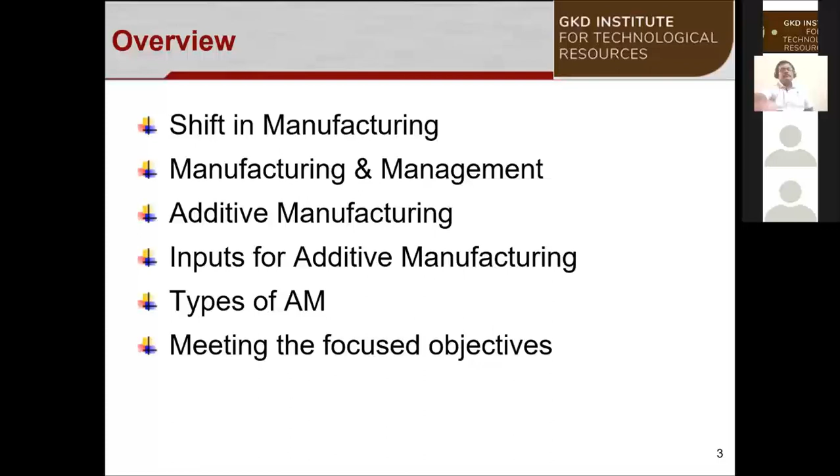So with the overview of both supply chain and additive manufacturing, then we'll touch on the objectives and some live case studies of the possible integration. So where did this shift in manufacturing happen?

We all know that in the early days, it was highly skilled labor, wherein he tends to produce excellent pieces of work, or excellent pieces of artwork. Here I have taken an example of a carpenter, wherein he had his own skills and produced one of a piece, or in the modern world, we can call it customization. He produced one piece and gave it to that particular customer. And that was maybe like 200, 300 years before, or even before the industrial revolution.

Then came the industrial revolution, and we moved into mass production. Whenever I was reading about where this actual manufacturing shift took place, I came across an interesting fact that we Indians played a major role in making the entire manufacturing take a major shift, or in a way we were the people who brought this innovation into manufacturing. How I can say that is, we all know the story of East India Company getting into India.

When East India Company came into India, the situation was they were in need of more rifles as the protest was growing in India. During those times, if we wanted to send information from India to Birmingham, or to London, it would take about 15 complete days for the information to travel from India to London. Then they would order for manufacturing the product, here meaning manufacture of rifles.

As mass production started changing, or the manufacturing was changing, all this time we were involved in a process called subtractive manufacturing, wherein if you want to produce a product, you take a bulk of a product, subtract whatever you need, and use that final subtracted quantity as your end product.

So that's why it was called subtractive manufacturing. All this time we were using the concept of subtractive manufacturing, and as the production need started spiking up, there came innovations and inventions in manufacturing techniques, like various types of machines came into existence.

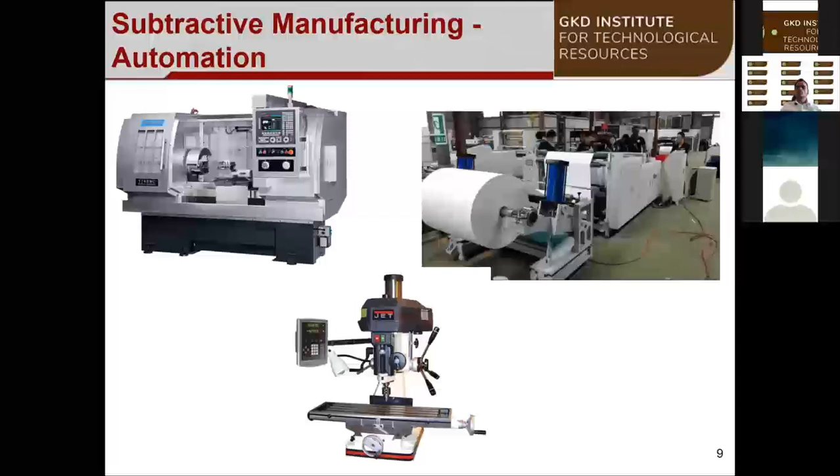Fine, but all the machines are not sufficient. So then we moved on to automation, wherein we wanted to go for mass production at a wider range. That is where subtractive manufacturing got combined with mechatronics, and then came the age of automation.

As we were moving on with higher production rate, people thought we need some more things to come in, and that is why we started finding a shift in manufacturing. Manufacturing started changing and getting improved. That is the time period wherein manufacturing and management got integrated together. They wanted to make sure the manufacturing happens smoothly through the entire supply chain within the entire industry.

So that is where many terminologies started coming up, namely assembly line, batch production, mass production, process optimization, automation, time study, method study, just-in-time manufacturing, lean, agile. All these management terminologies started popping up. This was the era wherein manufacturing and management found a good integration.

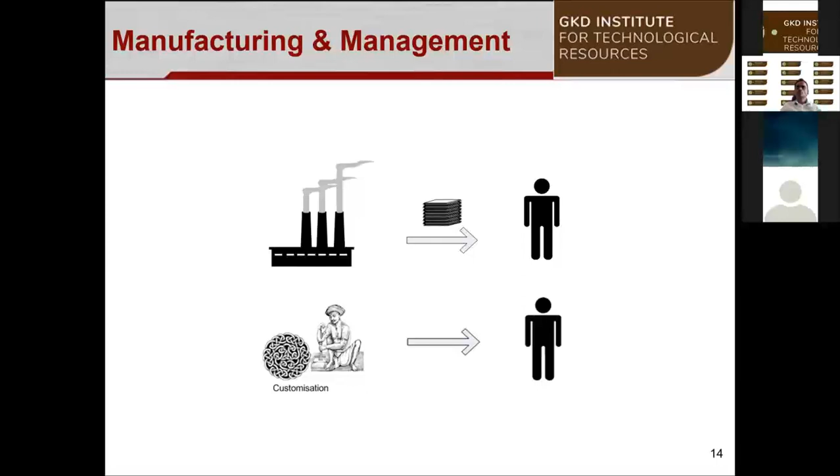Going back a bit, at the very early stage, there was only one manufacturer producing a component, which was a highly custom product, and he would deliver it directly to a customer. As time moved on, we could see a major shift in manufacturing and management taking place.

That led to a complete transformation in the supply chain. You had a bunch of manufacturers, then a set of wholesalers, then it moved to the retailer, and finally the product moved to the customer. So it was no longer from manufacturer directly to the customer, it took its own line. There came a major transformation in supply chain.

So we called it inbound supply chain and outbound supply chain. If we take manufacturing as playing its role in the middle, anything that goes inside is called inbound supply chain, and anything that goes outside towards the customer end we call outbound supply chain.

Ideally, if we take any supply chain, there are three flow lines that go by: one is the material flow line, another is the information flow line, and the final one is the money flow line. I'm not going to touch on the money flow line, just the material and information flow line.

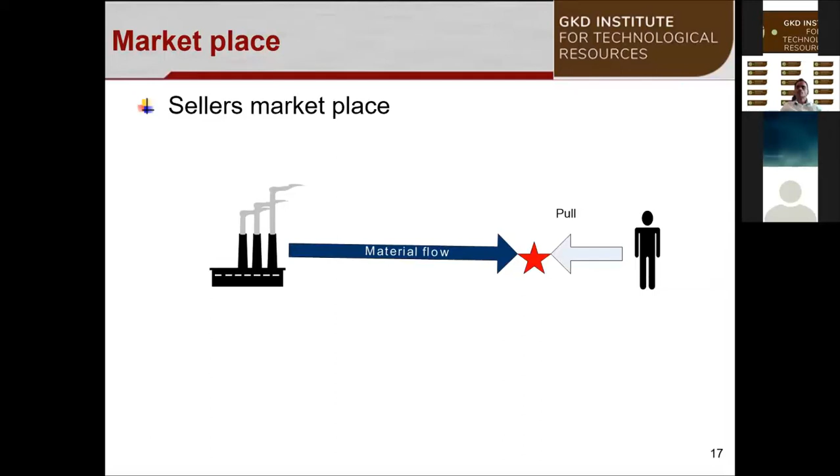So it was more of a seller's market. The examples we can speak of for a seller's market is where we could find a particular model, the 800 model, there in the market for more than 15 years. We had these bulk TVs, which were in the market for more than 20 years. And if we take one of the mature products, paste, that was there in the market for 50 to 70 years. So all these products existed when the market was a seller's market.

But now we know it is no more a seller's market, because we could see the automotive industries keep uplifting their models once every 4 years. And we know the electronics industry is bringing up newer technologies, 3D televisions, UHD televisions, the TVs are changing once every 6 months. You tend to find a new model coming out.

And even with the paste, we could find clove flavor. I was surprised to see that Colgate has about 21 different types of flavors, or 21 varieties of its own, in order to hold themselves in the market space. So this gives a clear idea that it is no more a seller's market.

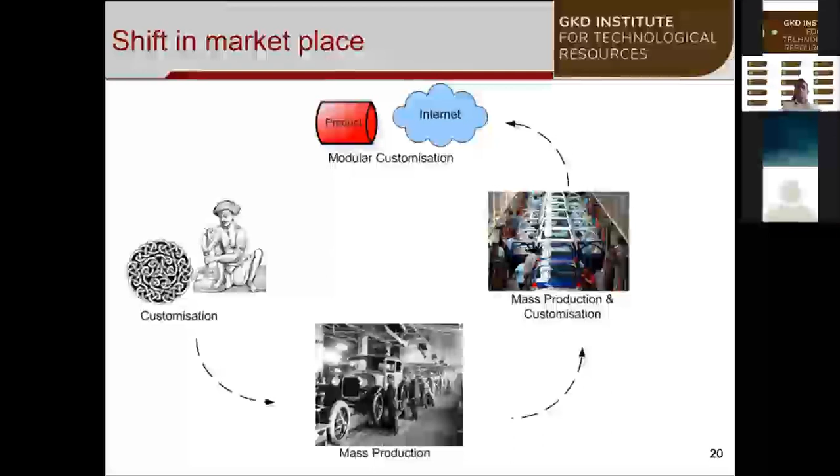The market has made a shift, and where that market had shifted is the question mark. So that is a market shift which is taking place. And what is the driving factor making this marketplace go for a major shift? It is nothing but information, because as we saw a few minutes before, information is the one which starts triggering the material flow, and the idea is information needs to go as much inside as it can, it is striving of itself to go as deep inside as possible.

And this was made vigorous with the invention of internet. With internet popping up, information started flooding inside, as much in depth as it can go. And this started changing the marketplace at a very wide range.

The moment information started going in, immediately what we had lost years or decades before, which was customization, slowly started popping up. Earlier it was mass customization, and from mass customization it moved to modular customization. Let me take you through an example of how information started bringing customers modular customization.

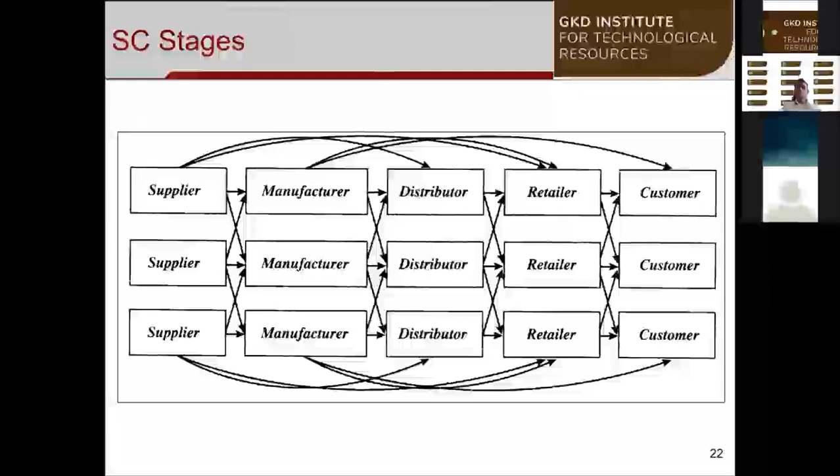Let us look at a product where we could see a customer involved in assembling the product. Most of the time I hear from people, no, I have never seen an issue where a customer is directly involved in assembling a product. Because I tend to ask: can you name one example where a customer assembles his own product? And if we take 1,000 customers, there are 1,000 customers who come with 1,000 different options for his product. And if I ask them to name that, people tend to say, no, that is not happening. But in reality, that started to happen 10 years ago itself.

Let me take you through a case example. If you want to go for a purchase of a computer, ideally when we go to purchase a computer, we have 5 different criteria in mind, or the most generalized ones that most people go for. One is the spec, like what hard disk they're looking at, what graphics card they're looking at, what RAM they're looking at, the price or budget they have fixed, and the design they are looking at.

Some people would like to have a lightweight, 14-inch laptop. Some people would say that for them a wider screen is better, so a 17-inch laptop. So it depends from person to person. The design becomes one of the criteria, and some people stick to certain brands, and we have our own notion on the brand, and we also decide how good the service is. So these would be the generic five criteria that we take before we go for a purchase of a computer. So when we go in with this particular spec, and go to a shop, we find so many computers there. Some way or other, we tend to make a compromise.

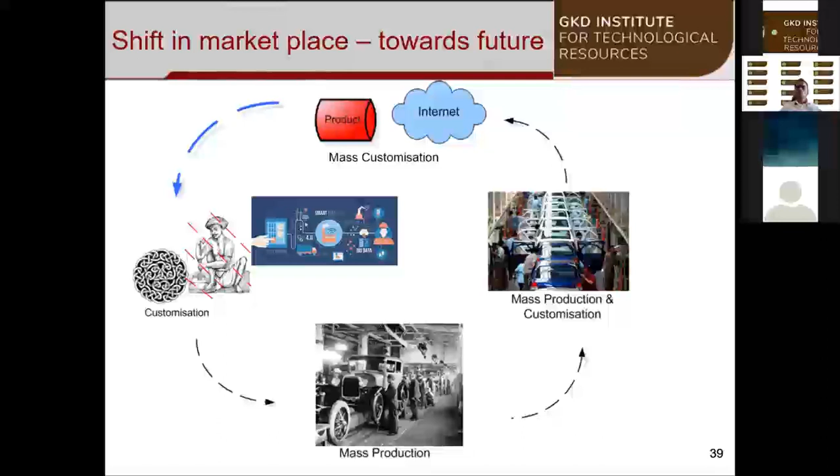In terms of manufacturing perspective, all that happened is it started to close the cycle, wherein the traditional highly skilled labor who was able to customize products is being replaced by newer technology, which is additive manufacturing technology, spoken of at a very wide range. That is why you would find Industry 4.0 carries additive manufacturing as one of the major entities among the seven different entities.

So, what is additive manufacturing? This idea of additive manufacturing earlier came with many names. This technology was ideally invented as a replacement to prototyping, because they got fed up with clay-based prototyping, thermocol prototyping, or wooden-based prototyping, as it was taking its own time. That was the period they wanted to make prototyping at a faster rate, and when they wanted that, they needed a better technology, and that is where it was coined as rapid prototyping.

So when rapid prototyping came into existence, this happened somewhere in 2001. Airbus was suddenly in need of a quantity of 400 nozzles which they wanted to place in their flight. They realized that somewhere they missed the paperwork and couldn't produce the die for those particular nozzles.

The demand was for 400 units, and now they didn't have time to produce them. That is why for the first time they thought, can we use rapid prototyping, because anyway it's a plastic component. They could make the drawing, and once they made the drawing, they knew they could print it in a rapid prototyping machine. So Airbus went for this technology for the first time and bulk produced 400 units. Rather than going for injection molding, they produced them in rapid prototyping machines. This made an entire change in the scenario.

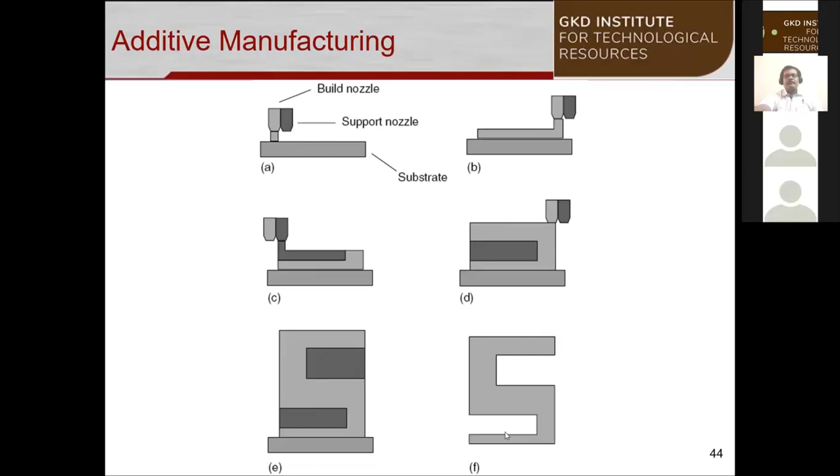Once the product is built, taking it out from the table, the support structures are removed, and you get this final end product for application. So this is the entire idea behind additive manufacturing, wherein you keep adding layer to layer and then you produce your end product.

Like all machine sequences, if we take a lathe, we need to hold the raw material, make sure it is centered properly, then go for clamping, and then go for the tooling operation. In the same manner, as we follow a particular sequence for each and every machine, like hobbing or a planer, each has its own sequence. Similarly, additive manufacturing also has its sequence, but the only difference is, no matter whatever be the type of machine, mostly the sequence of operation for additive manufacturing tends to remain the same.

Here, let us say that whatever you give as an input, it is converted into a common language, which you call as surface tessellation language. This is the language which is generally used in all the additive manufacturing machines.

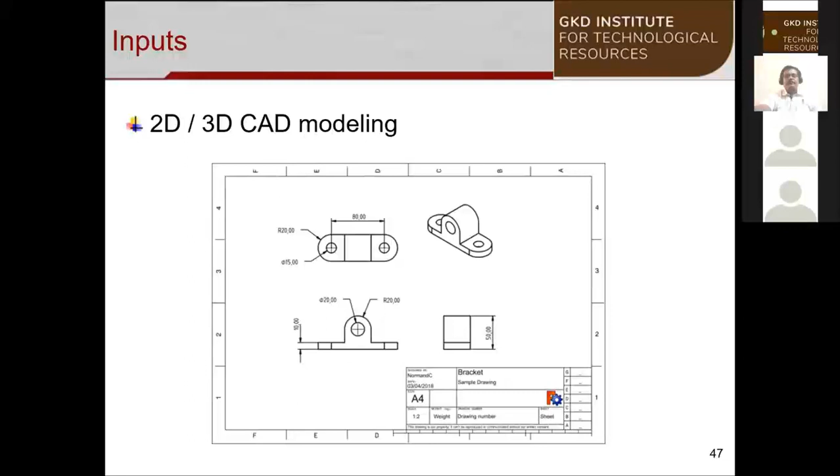Anything you give as a 2D or 3D drawing can be taken up. People were pretty comfortable giving 2D and 3D drawings, and that is the period they thought: can I use a CMM, get the data from there, and do a reverse engineering process? Because if I have a die which is worn out but don't have the dimensions immediately, let me put it under a CMM, probe it, and from the point cloud data fine-tune the dimensions and still manufacture it through additive manufacturing. So that was made possible.

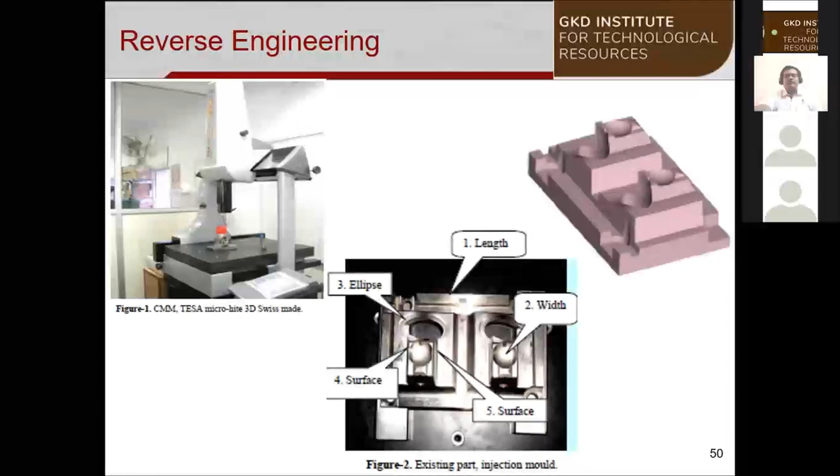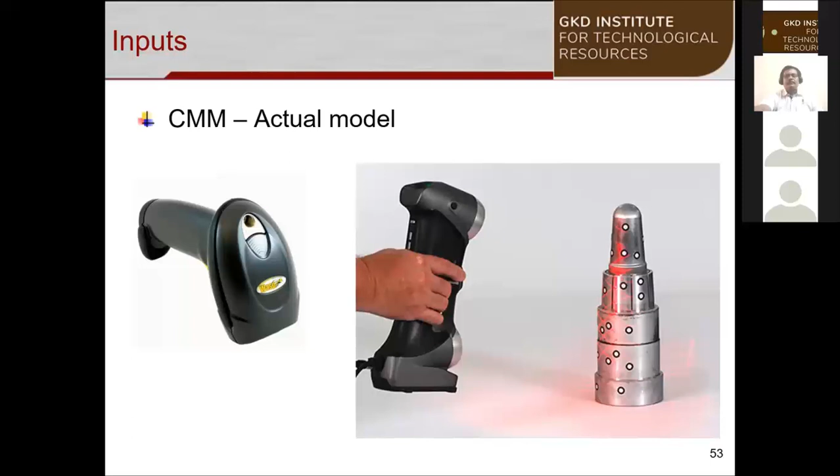Users of CMM know well that CMM can't be used for intricate profiles. So the idea came out with Faro, using non-contact measuring or laser beams to measure - again with a deviation depending on whether you use a white light or blue light scanner. Using non-contact measuring, you are now able to get very intricate parts which was missing earlier. Once you get the intricate parts, you can go for intricacy in terms of size, complexity, or hidden values as well. You can pick the data from various scanners and still go for printing it directly in one of the additive manufacturing machines.

The idea doesn't stop there. It also moved to taking data from MRI or CT scan, wherein you get the data in DICOM files, and from DICOM you can convert it into an STL file, which could be manufactured using an additive manufacturing system.

So we need to understand all the intricate requirements - if I only need bone data, I would go for a CT scan. But if along with bone I need fine tuning in the flesh or nerves, I would go for MRI data, pick it from there, and produce the final end part of the requirement. And it doesn't stop there, as I mentioned, imagination is the only limit.

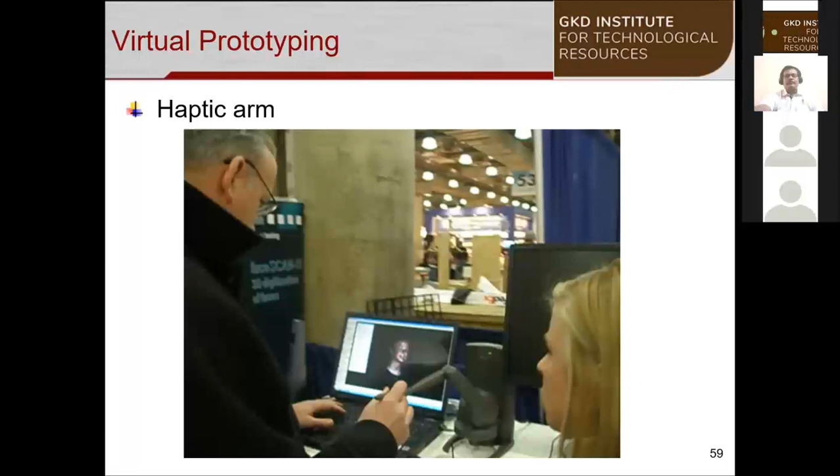That is where Geomagic Hapticom came into existence, wherein we know that we can't draw the profile of a hand, or something of very complex or inclined profiles or B-splines, which is not at all easy in any other drawing tools, because much of our drawing tools can focus only on lines and curves, mostly in terms of lines. But when it comes to complicated curves, they won't be in a position to support it.

That is why Hapticom came into existence, wherein you can draw very intricate profiles which was not possible earlier, and those could be given as an input for an additive manufacturing system.

In concise, additive manufacturing can take data from 3D CAD, 2D CAD, point cloud data from the CMM, and also from any diagnostic tools like MRI or CT scan data. All this could be given as an input for a 3D printing system, and the part could be printed.

One very important thing is most people think that once they have an additive manufacturing system, they don't need to bother, and the system by itself can produce a part. But that is not the reality. The reality is, just as you expect skilled labor for operating a traditional subtractive machine, the same type of skilled labor is essential for an additive manufacturing system also.

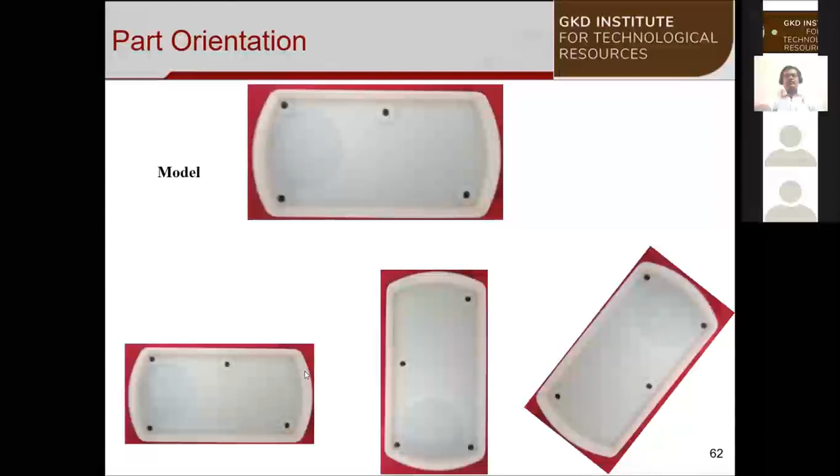The reason is, you can print a part, and the way you print it would change the entire scenario. Let me take you through an example. This is a plastic part that needs to be printed. I can print this part by putting it horizontally on the machine table, or I can put it inclined on the machine table.

Depending on how I orient this part, it is going to change the amount of time it takes, and also consume the raw material differently. If I put it horizontal, it's going to take around 20-29 minutes for the part to get completed. The same thing, if I put it vertical, it's going to take 1 hour 49 minutes.

Same part, no change, but now putting it completely height-wise, going for a higher Z axis, means it's going to take 3 hours for the support material to be generated, 3 hours for printing, and 3 hours for cleaning. The actual material quantity doesn't change, but the support material quantity changes based on orientation.

It doesn't stop there, it also affects the quality of the print you're going to get. You need to decide what quality you're expecting out of a 3D printing system, and give a clear understanding of that. Based on the quality, you need to orient the part, because based on orientation, your time and material consumption are going to change.

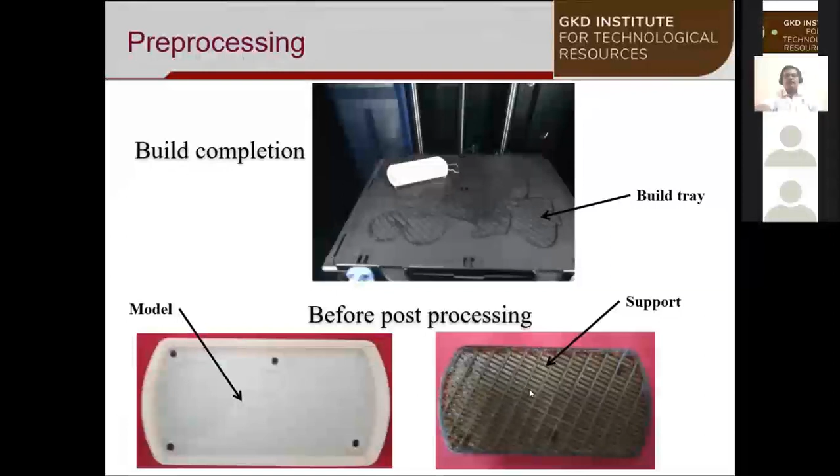So this is the part that is printed in an FDM. You could see that we oriented it in a horizontal manner, because that was the best orientation we wanted to have, and the support structure was just removed off, as it is a breakaway support structure.

When we are printing any complex part, it doesn't stop just by printing. It also takes time in terms of post-processing. So we need to take much care with post-processing when it comes to additive manufacturing. With that idea in mind, we'll take a look at the additive manufacturing process, and then see where we can integrate additive manufacturing and supply chain together.

If we take the additive manufacturing process, it broadly classifies into two types: the material first approach and the process first approach. In the material first approach, you choose the machine based on the type of material you're going for. Are you going for metal? Earlier there was an option of metals and plastics, but now the division is metals and non-metals, because now you can even print rubber-like parts using an additive manufacturing system. So either you print pure metals, or you print non-metals, where you can change the shore hardness of a particular part. That is the advantage of non-metals. When it comes to metals...

You no longer need bulkier products, or to think of design for assembly or design for manufacture. Here, whatever your analysis package says is the best option for reduced material consumption, optimum load-withstanding ability, or optimum thermal resistance, you can straight away go for that option in metal additive printing. But if you're going for metal additive printing while still following a traditional engineering style process, that option is not available to you.

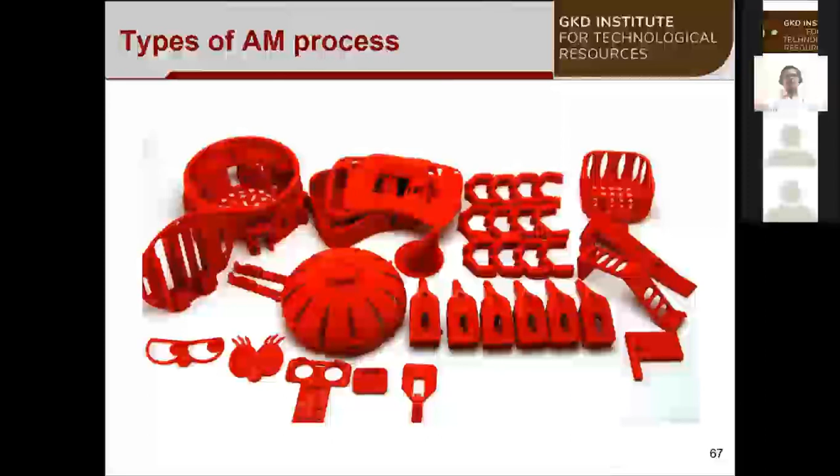So moving to plastics, or rather, moving to non-metals - ideally classification goes by the type of raw material you are going to use. Are you going to use it as a solid, a paste, a liquid, or a gaseous form? At the moment, much of the gaseous additive manufacturing technology has been completely removed. It is more solid, liquid, or semi-solid based.

Among these, I'll quickly touch on the different types. The first, very renowned type is called stereolithography, or SLA. The idea of stereolithography came from Polaroid cameras, where you take a 2D picture, expose it to UV light, shake it off, and get your final photo. Looking at this, people thought: if I can make a 2D picture immediately, why can't I make a 3D picture? That is where stereolithography came into existence.

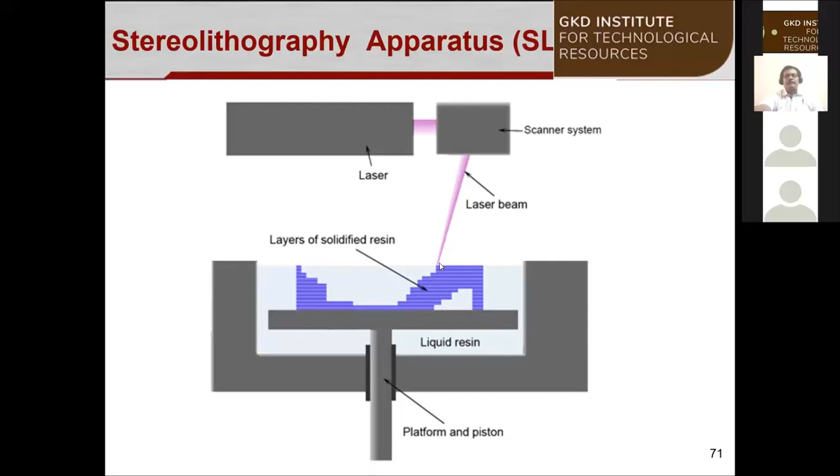Here you can see layers have been built. Once those layers are built, the machine table moves down, and the liquid resin comes to the top. As the process repeats, the table keeps moving down for every slice, and liquid material comes up for every slice, and the part is built in this manner.

I have a short video which describes how it is done.

Motorola Product Testing Services offers rapid prototyping utilizing state-of-the-art stereolithography technology.

The prototyping process begins with the conversion of our customer's three-dimensional CAD drawing into a file that is exclusively used for the rapid prototyping procedure. The part is virtually positioned in order to obtain optimal quality, accuracy, and fine detail preservation.

Special software prepares the file for a prototype build by converting the design into thin cross sections that map out the solid regions of the part.

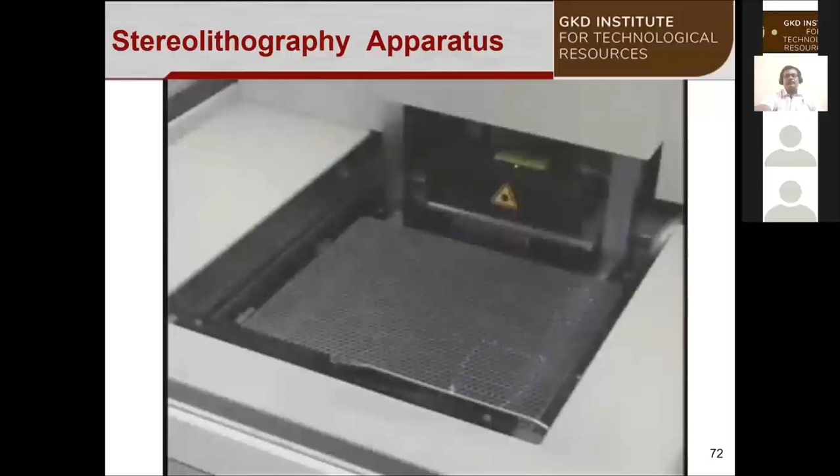When downloaded, the output file guides an ultraviolet laser beam and scans a specified cross section on the surface of the liquid photopolymer resin. A platform attached to an elevator assembly is used as the foundation for the prototypes and incrementally indexes the platform into a vat of resin.

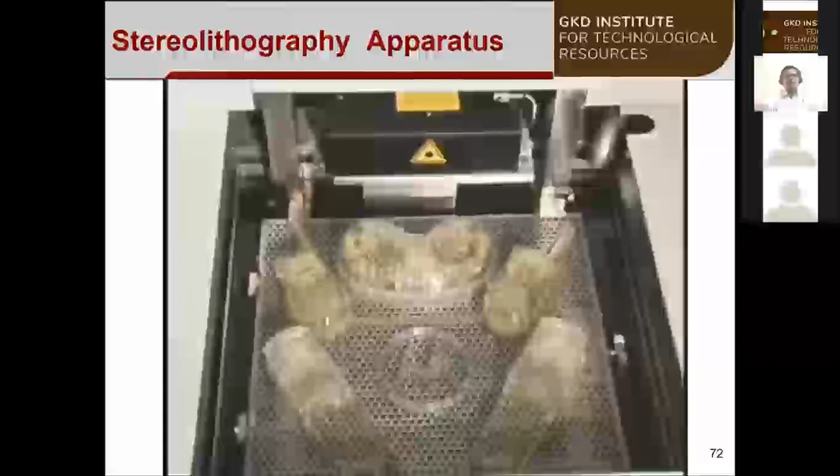Once the liquid photopolymer resin is exposed to the laser, it solidifies into an epoxy-like plastic material. The process is continued layer by layer, cross-section after cross-section, until the part is complete.

Once the building procedure is complete, the prototype part is removed and processed through a solvent rinsing system to remove residual and uncured resin. The part is then cured by placing it in an ultraviolet post-curing apparatus.

After finalizing the curing process, the part is ready for hand finishing, sanding, bead blasting, and painting, dependent on the intended use of the prototype as specified by our customer.

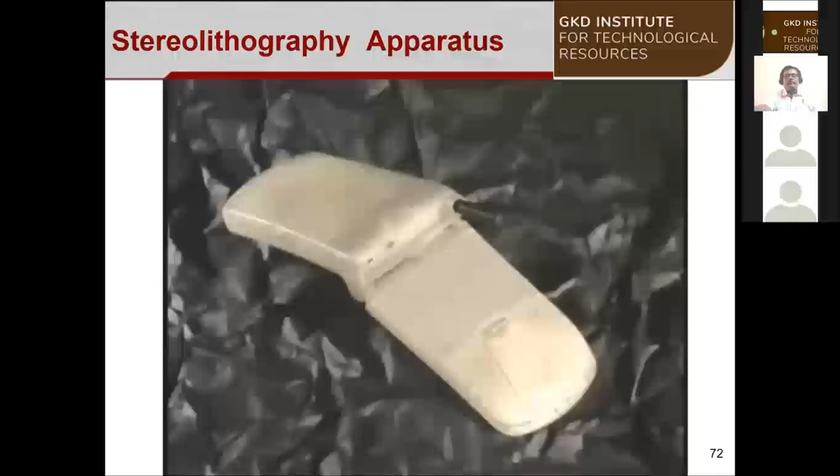With 10 years of experience, our rapid prototyping team has the skills and resources to provide our customers with accurate and professionally refined prototype parts that can be utilized for design verification or tooling aids, analyzed for fit, form, and function, or exhibited for promotional purposes.

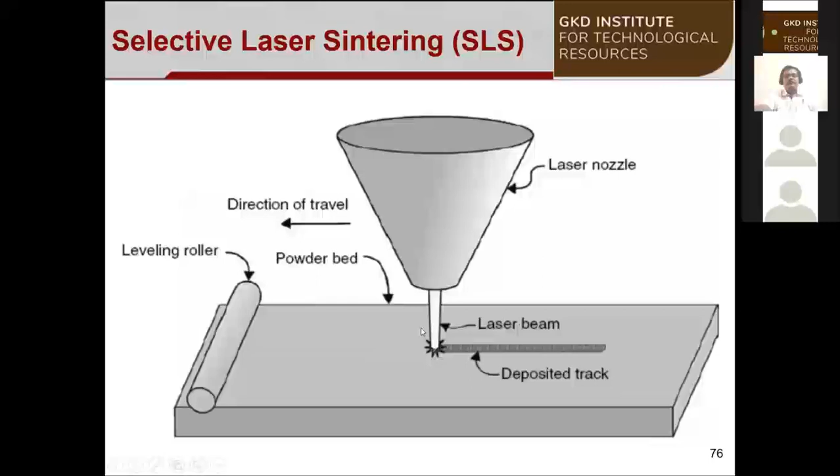And once the raw material is spread out, the leveling roller stays here, and then the laser burns the region where the part needs to be built.

...the process gets repeated. This was the very early system which was designed. People realized that the idea behind additive manufacturing is to speed up the process, and they realized that because of this one delivery piston, the entire system is stopping for some time -- and that is where they came out with the idea of two pistons.

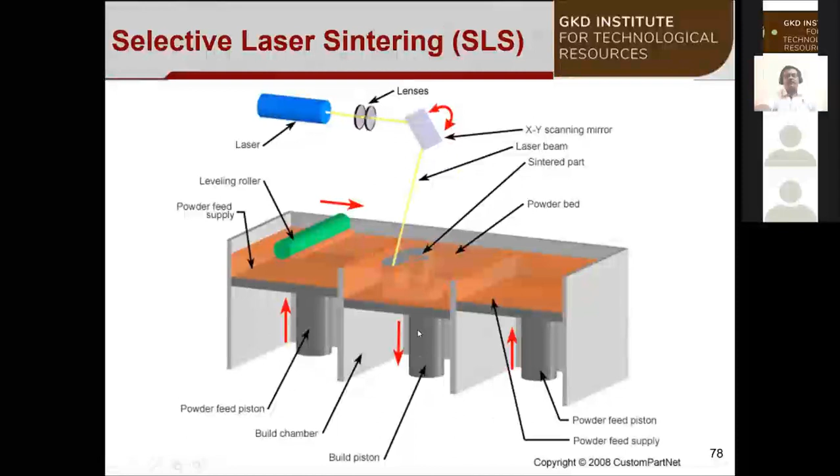I have a short video which describes how it is done.

These are the two delivery piston sides. Here you can see one of the delivery pistons moved up, and the leveling roller moved the material. As the laser light blows, the part is built. Once the part is built, the leveling roller again spreads over the material and moves to the other end.

Once the entire process is done, you move the table up, and the entire part along with the support material comes out. You take the entire part out.

Your actual component is surrounded by the raw material. You just remove off the raw material, and we can reuse it in a proportion of 80-20 — that is, 20 parts new raw material and 80 parts old raw material.

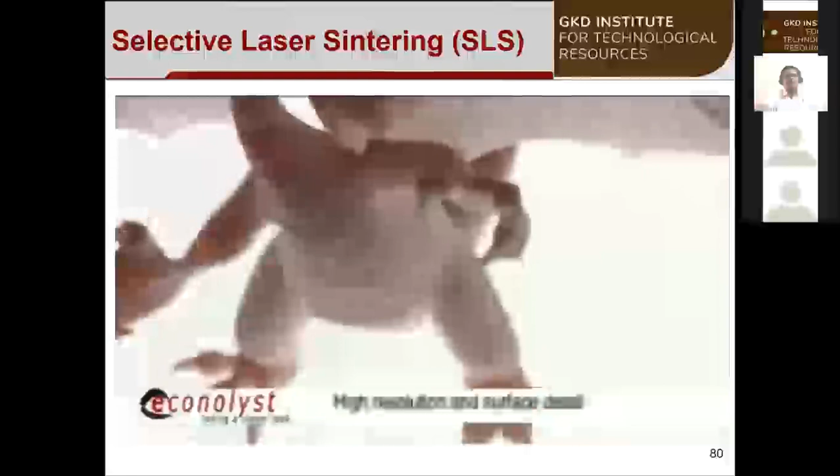One of the best things about this SLS process is you can build any complex profile parts, and you can directly take it for application. You don't need to do anything further to it. Any complex profiles — this gives an idea that your imagination is the limitation. Anything you can imagine, you can build using a selective laser sintering process.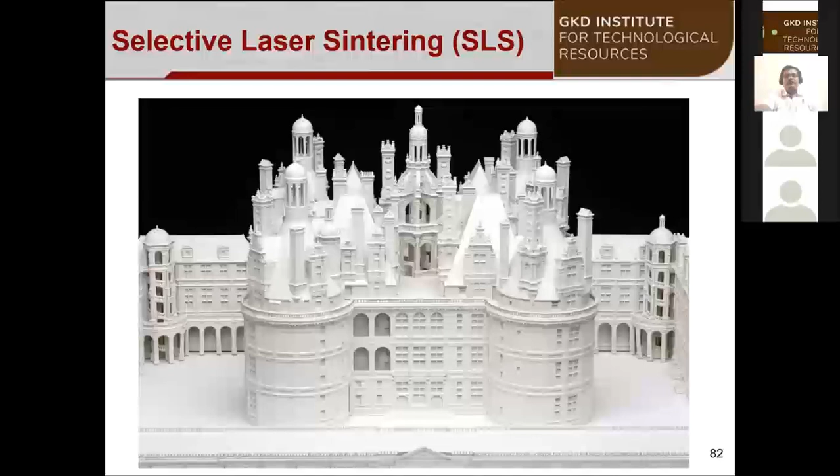One typical example is an architect, before spending crores of money on a building, wanting to visualize it. This is one of the very complex structures which can't be built by any other 3D printing or additive manufacturing technology. SLS is the only option wherein you can print this. No complexity is lost, everything stays in line.

The next one is the very widely used FDM technology, or fused deposition modeling technique, which was developed in Minnesota. The idea is you slightly heat the material, and as it touches the melting temperature, you extrude that particular part.

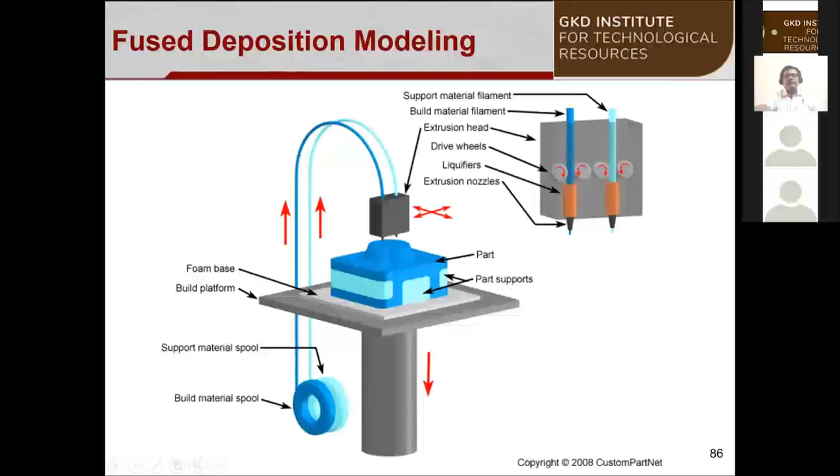You can use products suitable for medical grade plastics, fire retardant plastics, ABS, or elastomers — all those are possible. There are two rollers: one is the support material, and the other is the actual material. The blue one is the actual part, while the light blue one is the support structure.

Here is a description of how FDM works. You can build durable, accurate parts.

Simply sending files right from your desktop or over your network. Strong and functional parts are built from your 3D CAD files using patented Stratasys fused deposition modeling technology. Powerful Insight pre-processing software imports STL files and automatically slices the part, generating the necessary support structures and extrusion paths, maximizing build efficiency while minimizing user involvement.

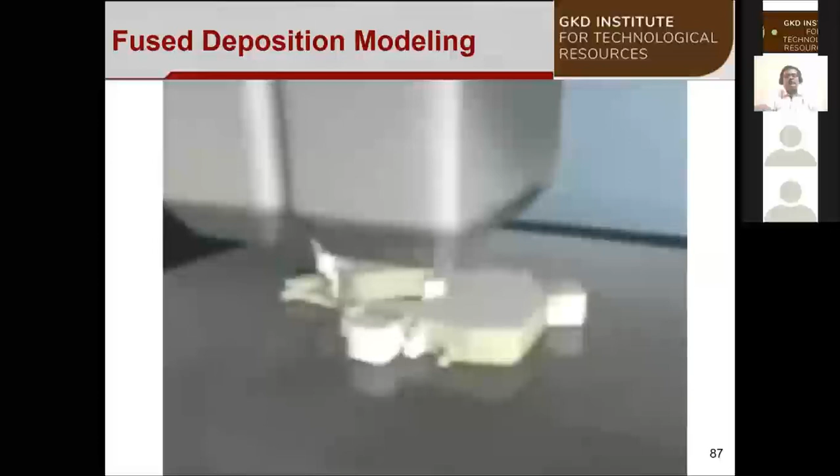Inside the system's heated build envelope, model material in filament form is heated to a less viscous state for extrusion. The model is built layer by layer from the bottom up. On each layer, the extrusion tip follows a precise path depositing plastic modeling material, along with any necessary support structures. When applicable, Waterworks provides the final step, enabling complex geometries and fully functional assemblies in a single build. Soluble supports are simply dissolved in a water-based solution, resulting in a part with smooth surface finish and fine details intact.

So here we have seen a case of fused deposition modeling. Among the types, it is one of the cheaper techniques to go for. And here are some examples of products that could be manufactured using this.

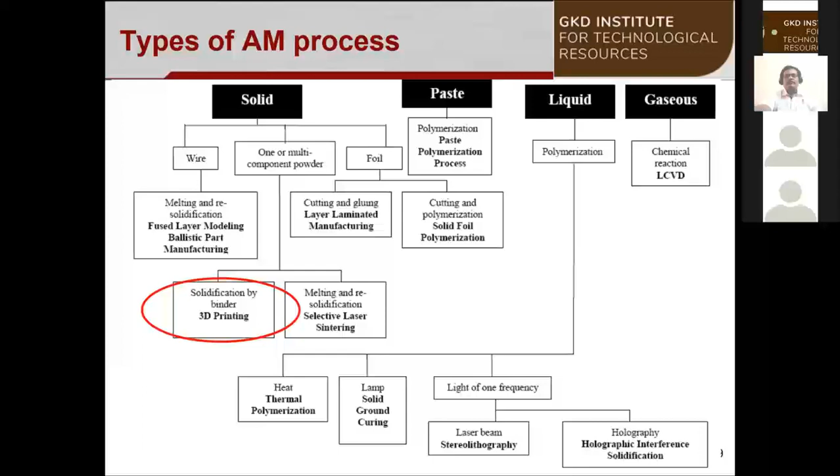All we have seen so far is either a transparent part or a white ABS part. But what if you want color parts for visual communication, for sharing the idea of a component with a supplier? Under that circumstance, 3D printing is one option, wherein it uses multiple colors in order to build a part.

Here you can design a part. Once after designing a part, you can pick and choose the colors that you want to orient for it, and then you can print the part.

Once the binding has happened, you tend to get the final end part. So it is more of a binding of one layer with the other layer. And mostly what people tend to do is...

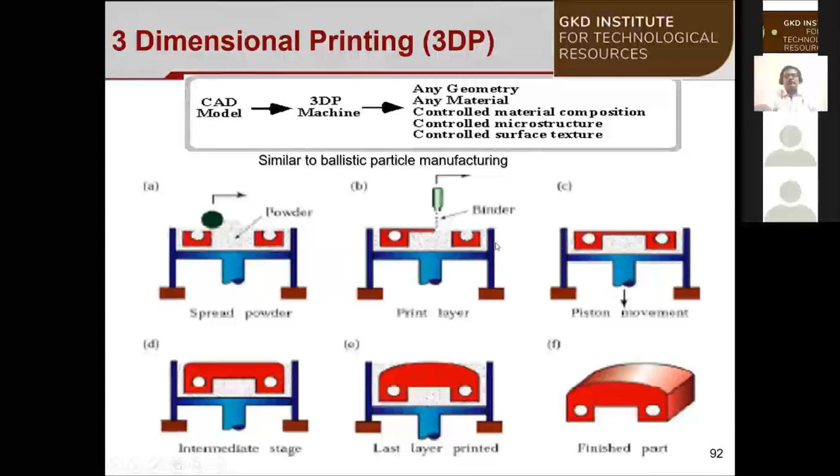ZCorp, at the very beginning, defined the color code with the binder. So wherever you need a different color, the binder gets color infused, and based on that you tend to get the particular color for each and every layer. And by that way, the part is produced.

So here is an example of a certain 3D printing part, how the part is being printed using one of the 3D printing labs. 3D models are easily and affordably delivered.

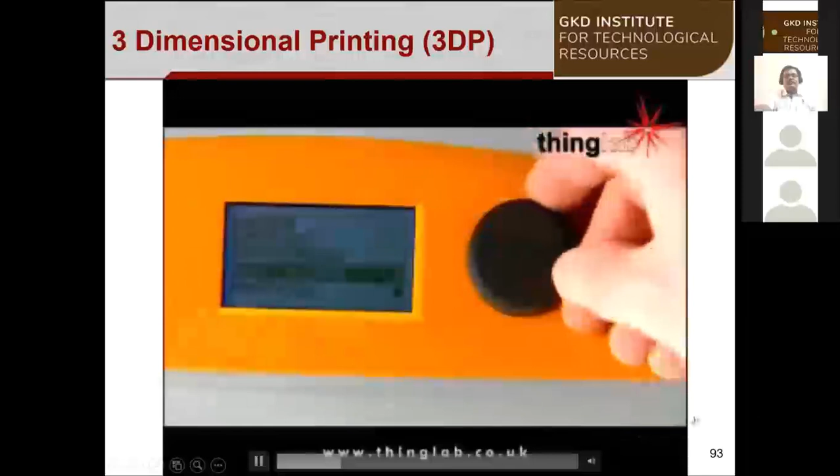The Z Printer 450 brings CAD files to life as realistic physical 3D models with precise details and brilliant color, and does so 5 to 10 times faster than other systems at less than half the cost. Dramatically present the proposed look, feel, and style of product designs and prototypes, vividly display architectural visions, and better communicate 3D information in education, healthcare, and the arts, all in ways that electronic displays cannot. The first automated 3D printer, the Z Printer 450, is remarkably easy to use and very office-friendly, with clean, quiet operation. Come and see for yourself at ThingLab's Central London demonstration studio.

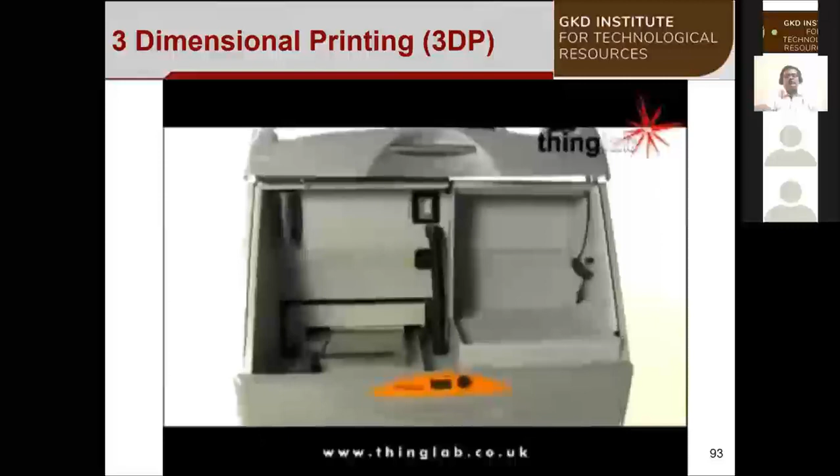The Z Printer 450 is for those seeking high-quality color models, with the convenience of an in-house printer to build those models anytime, anywhere. The uniquely automated Z Printer 450 simplifies the entire 3D printing process. Self-contained and self-monitoring, it manages nearly every aspect of printing. Simply import your 3D data file into the Z-Print software, position as desired, and follow the prompts. The system automatically checks supplies and printer readiness, ensuring you always have the right amount of materials to complete the job. If supplies need replenishing, it's as easy as inserting a 1 litre binder cartridge and connecting.

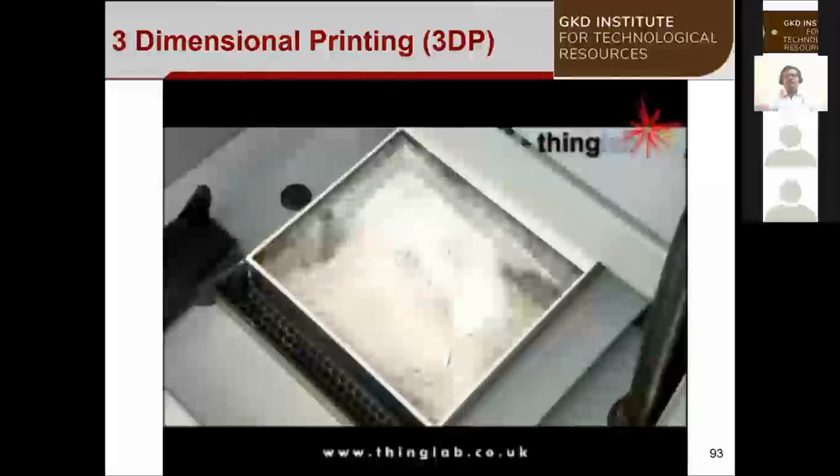When ready, click 3D Print and watch your 3D model emerge from the bottom up, one cross-section at a time. In 450 DPI resolution, advanced inkjet technology builds models 5 to 10 times faster than any other rapid prototype systems. So you get your model in hours, not days. When printing is complete, a vacuum and motion system automatically removes up to 80% of loose powder and recycles it for future use. Removing the remaining powder is just as easy, using lightly compressed air in an enclosed chamber that vacuums away particles.

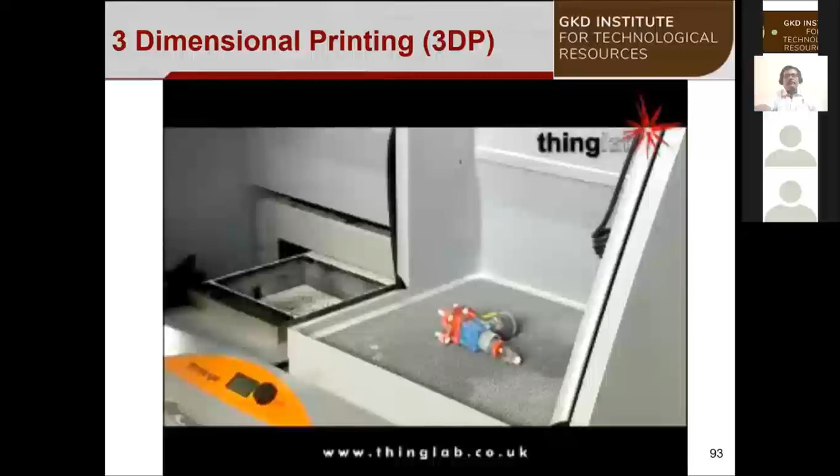Plus, no physical support structures attached to the model, like in some other parts. There's no scraping tools or chemical baths. Every 3D model is clean and ready for finishing. Choose a quick dip in Z-Bond sealant, followed by a short drying period. Get the same effect by dripping Z-Bond over the model, or lightly brush with Z-Max infiltrant for a strong, brilliant color finish. Whichever you choose, you get a smooth, vivid color model that lasts, and you get it fast.

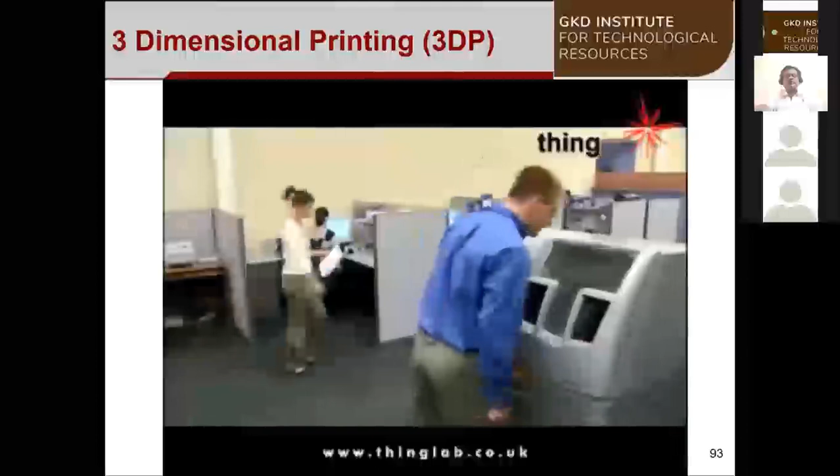In fact, from start to finish, this model was printed, depowdered, and finished in under 4 hours. The Z-Printer 450 is incredibly office-friendly, with a small footprint, negative pressure dust control, noise suppression, and zero liquid waste. It's just like any other printer in your office. Everyone can afford to create 3D concept models, functional product prototypes, architectural models, and more, and do it all in-house.

So when it comes to 3D printing, if you're only looking for an option of a knowledge sharing process, or you just want to see the prototypes before application, or you want to discuss about your product with your vendors, 3D printing is the right option.

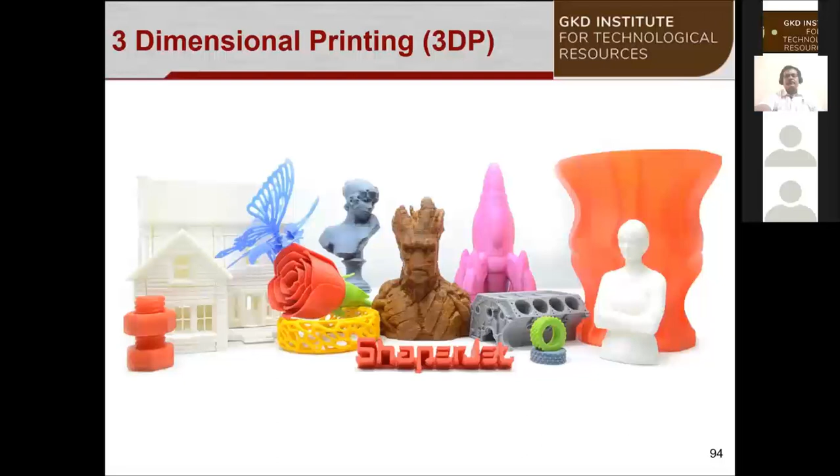Any part that you print using the 3D printer, you cannot directly take it for application, because of the way it is manufactured, it doesn't provide the right strength. So the product tends to fail during application.

So we have seen the very widely used technology, and then people thought, okay, I wanted to make a core for my foundry, and I am looking for a possible machine for that. Yes, one of the options that is available is laminated object manufacturing, or otherwise it is called LOM.

The idea behind LOM is you supply the raw material in sheet form. This raw material has glue at its base, one-sided like sellotape, wherein it is glued on one side and gets spread up. Once it is spread up, a leveling or laminating roller slides over to remove any possible air bubbles that would arrive.

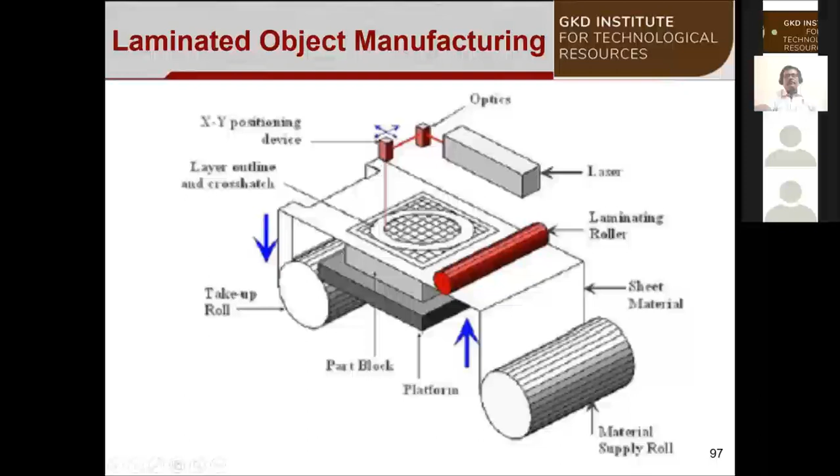This is produced in such a way that the ring could be taken off easily once the process is done. For the next layer, the take-up roll rolls up the extra material while the material supply roll starts feeding a newer set of material. By this process, laminated object manufacturing produces parts layer over layer, and it is suitable for applications where you want to produce parts like a core for your foundry. That is a place where you can use it.

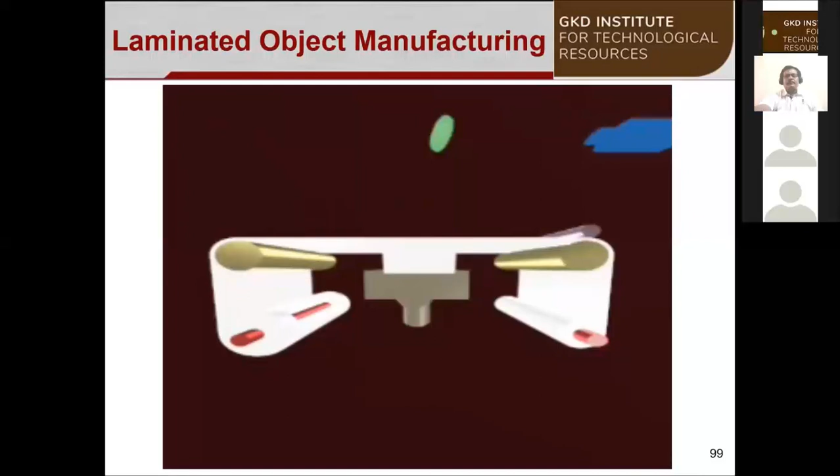So anything that you produce, you can use LOM as an application where you can do that particular process.

Now moving to a technology called polyjet technology: if you want to produce a transparent part, you can only produce it by stereolithography. If you want to produce a complex part, until now SLS is the only option. And if you want to produce colorful parts, 3D printing is the only option. But polyjet gives a combination of all these three technologies together in one single technique, which is the polyjet printing technology.

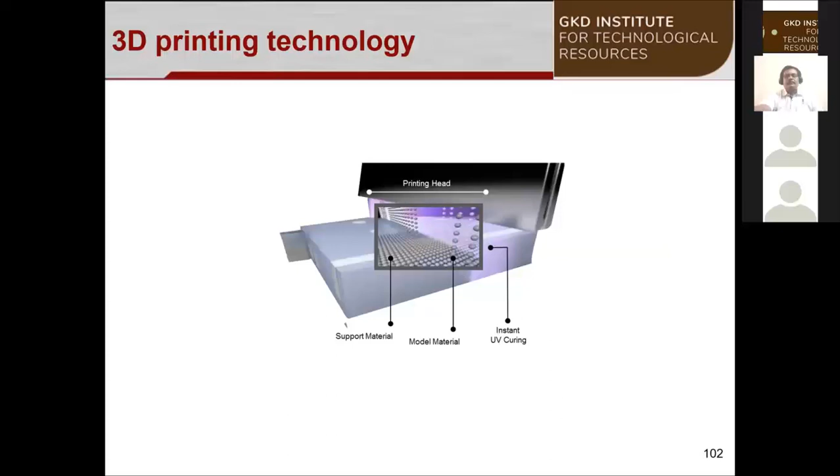It has about 8 different print heads, wherein four are for delivery of support material and four for delivery of model material. The material is distributed in the form of droplets. Once it is delivered according to the layers where it needs to be produced, UV light passes on and hardens the resin. Once that is done, the next layer starts up.

Here I have shown an example: if you want to produce an ABS part, that is possible. If you want to produce a polycarbonate part, a glass-like structure, that is also possible. And if you also want to produce rubber keys, that is also possible too. All these three things are possible in this particular technology, whereas earlier, if I wanted to produce a polycarbonate or acrylic-based part, I needed to go for stereolithography.

For this I needed to use SLS or FDM, and for this I couldn't do it in earlier technologies at all, because earlier technologies don't permit printing rubber-like parts. Whereas in polyjet technology, it is possible to print rubber-like parts as well.

All these three different materials can be printed in one single go. On top of that, I can also change the Shore hardness level. We know that Shore hardness 100 is very hard, while Shore hardness 20 is quite flexible. So for one single part, I can decide, for example, that I need this part to be Shore hardness of 20.

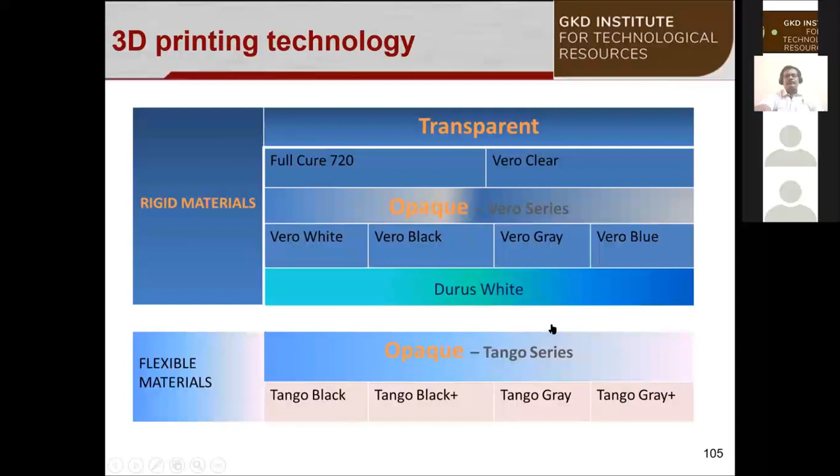This is also a place where we can use digital materials, combining different materials and different combinations of colors. Everything is possible using this technology. It was said that even Google Glass, which they used during virtual or real-time operations, used this technology.

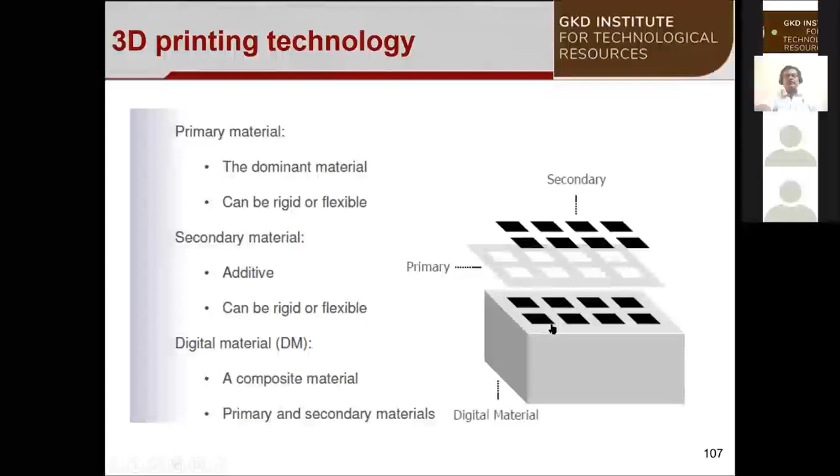Here it uses three different types of material: the primary material and the secondary material. The primary material tends to be the dominant one, and the secondary would be a flexible one. I can also go for a digital material wherein if I want to change the Shore hardness of the material from time to time, I can do that using this particular technology.

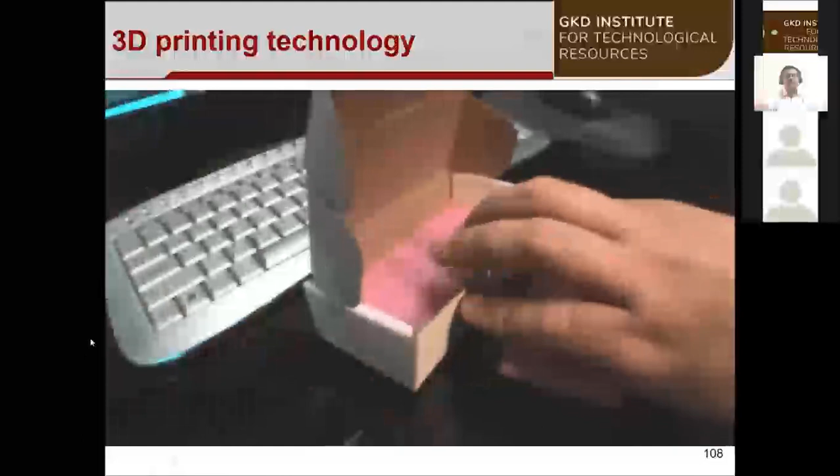So here we have seen a case wherein we can print all these combinations, and very importantly, a brush-like structure is printed over here. That is a rubber and a plastic one has been made. In traditional manufacturing, we would end up gluing it together or giving some notches for fixing these two. But now you can manufacture these two combinations together in one single go, which is very widely used. These applications are very widely used in pump industries or textile industries, where they wanted to hold both combinations of plastics and rubber going together. That is where this particular technology is widely seen applied.

Moving back to the objectives of the webinar, now that we have seen what additive manufacturing is and where supply chain stands separate, we touch on the objectives of the webinar: customer involved product manufacturing, and how we can reduce the inventory and lead time on custom products. I'll take you through some examples.

When it comes to the integration of supply chain and additive manufacturing, or the early names of rapid prototyping, rapid manufacturing, 3D printing, you need to decide what you want to achieve through that integration. That is the very crucial fact to start with. Here, I have shown this integration application, wherein I wanted to produce very customized products. I wanted to bring the customer as much inside the supply chain as I can. I want to produce the product completely focused on the customer. My requirement is to produce products which are very complex in nature and can't be produced by traditional manufacturing systems.

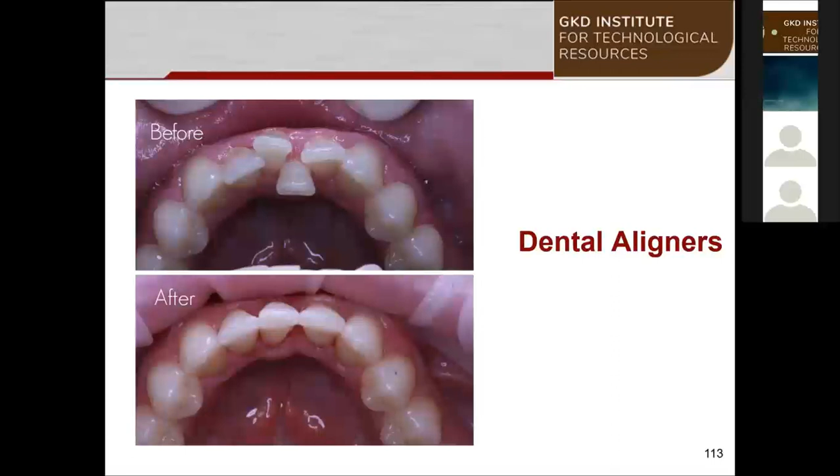If we think about it for a bit, we all know that dental aligners, or the braces that we use, are the only technology available. And even when we have a small chewing gum in our mouth, we know how difficult it is to have or take our own food, because it is not easy.

You can imagine what people go through when they have aligners placed in their mouth continuously for 15 days, or metal braces that lie inside their mouth for 15 continuous days. Once every 15 days, they tighten the metal braces and realign it stage by stage.

We try to see when these dental braces were invented, and it goes back to the 1700s. From the 1700s till now, the only difference is they have improved from the traditional method. This was the French method, wherein they put a drill in the tooth and tried to align it. From here, we have moved to modern methods.

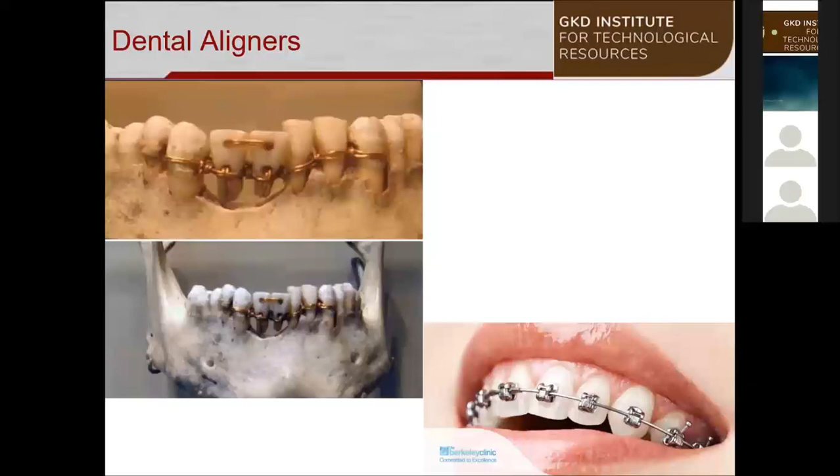But still, it is not the one that gives comfort to a patient. Again, in spite of comfort, there is no accurate way it is done. So it is still done in a very traditional manner.

Even then, when they do this using metal braces, people who wear metal braces - there is a high amount of data showing they tend to have more cavities because it is not easy to clean the tooth while wearing these metal braces. There were situations where, while tightening, the tooth tends to get broken off. So these were some of the practical problems that occur when they go for aligners or dental braces.

So alternatively, there is an alternative method which was focused on, which is the dental aligner. The dental aligner was seen as a recent technology which came into existence to replace traditional dental braces, because dental braces, once worn, need to stick to that for a continuous 15 days, and then only they tend to fine tune it.

But according to maxillofacial surgeons, if you are placing these aligners inside your mouth continuously for 8 hours, that is more than enough to move or alter the tooth inside. Wearing it for 8 hours is an easy job, whereas we can't go to the dentist every 8 hours, so that becomes a tedious job. That is why dental aligners were seen as a mechanism, an alternate to dental braces.

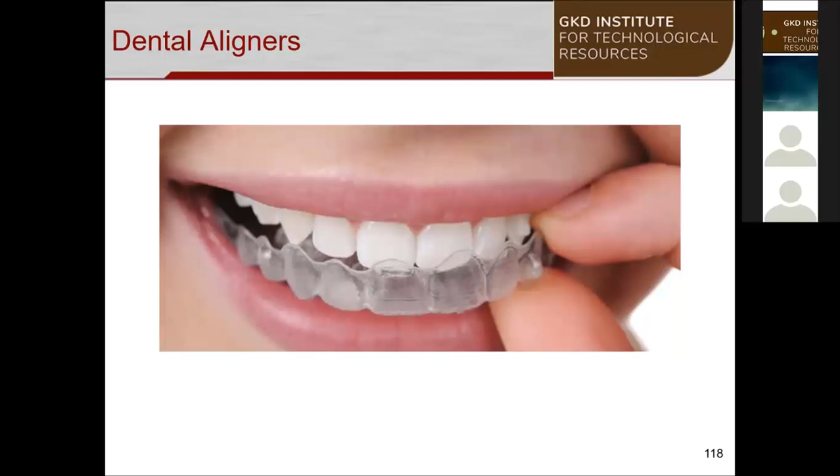And the way these aligners are made is, first, when they go to a dentist, a negative mold is taken. So you have wax which is placed in a mold. The dentist would ask you to hold the wax, bite this mold, and hold it for a timeline of 20 minutes.

One very important thing is, when we bite it and hold it for continuous 20 minutes, our body is designed such that our neural system will start moving once every 30 seconds, our body tends to move slowly. So for every 30 seconds whenever we move, it starts creating a clearance gap. And we know that this mold is going for real-time application, so as the gap tends to widen, that means we start losing our accuracy.

You can imagine that in a matter of 20 minutes, how many times we will be moving. So the more we move, the more the clearance gap is going to be created, and based on this clearance gap only, the aligner is going to be manufactured. That is number one.

Now, in spite of the gap created, or in spite of movements, they tend to take this mold, and after taking the mold, they put plaster of Paris, and then take the positive mold. For this positive mold, by thermoforming method, an aligner is prepared, using vacuum thermoforming with bio-based dental sheets, which is 0.65 mm or 0.52 mm in thickness.

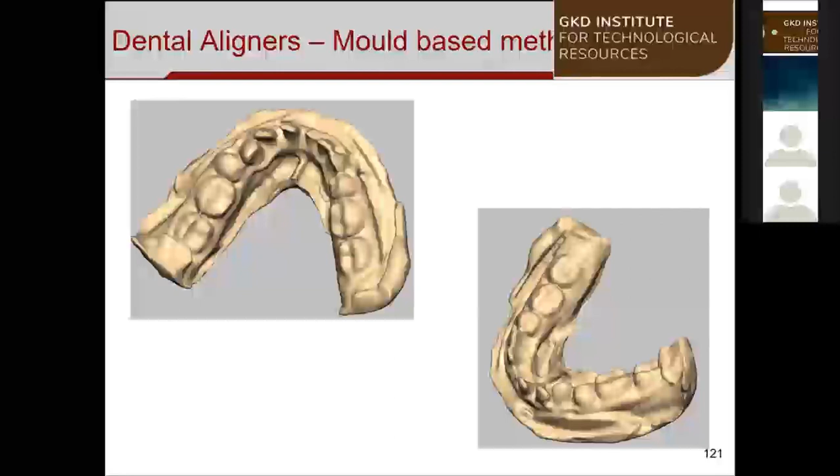So we came out with an option wherein using a dental scanner, or through the inputs for additive manufacturing, an entire scan of the tooth is undergone. So the time the patient goes to a doctor, an entire scan of his tooth is done, along with the gums.

Once it is scanned, we take this image to the Geomagic tool, which we came across in the inputs for additive manufacturing. We move this entire file to Geomagic, and there we put this entire dental tooth, and now we get the profile of the gum.

Based on the profile of the gum and the tooth, we move to Geomagic, which again is a CAD based software. Now I know what angle I need to rotate, what inclination I need to alter - that's possible here. We're speaking of exact accurate angles and exact accurate measurements that we can undergo. So based on that, the entire tooth profile is changed, and the gum profile is also very clear for us.

For this, I tend to just make a positive mold. All I do is give a positive thickness to it, of 0.25 mm. So according to the complete exact profile of the tooth and the gum, the part is made. Once the part is made, the aligner is made, we go for polyjet based printing.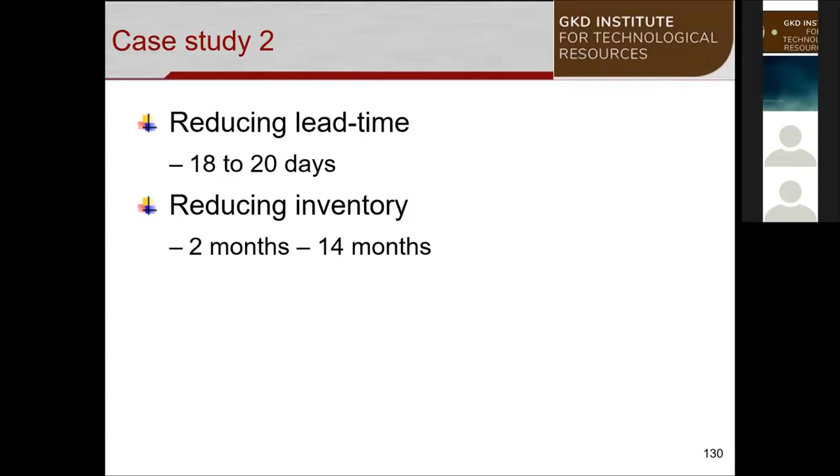And when this entire product fails, it starts creating a queue inside the system, and causes further delay. So this is a part we worked on with one of the leading eye hospitals in Coimbatore.

We all know that when we go for an eye inspection, first they ask us to check the pressure of the eye. When they check the pressure, it's nothing but a plunger-like device - you put your face up, and they bring a probe, and a certain amount of high pressurized air is injected on your eyeball, and from there they measure the pressure of the eye. So for doing that, they have a plunger-like device, and this is the plunger-like housing wherein they press it maybe a couple of times in order to understand the reading of the eye pressure.

So every day, at least some 200 patients have been tested on this device. That means even if they press the plunger 5 times per patient, you are speaking of 1,000 plungers very easily, so once in 3 months this entire device tends to fail. At this particular hospital, they have some 15 to 20 devices, and even if one device fails, the queue starts building up as they go to another testing facility.

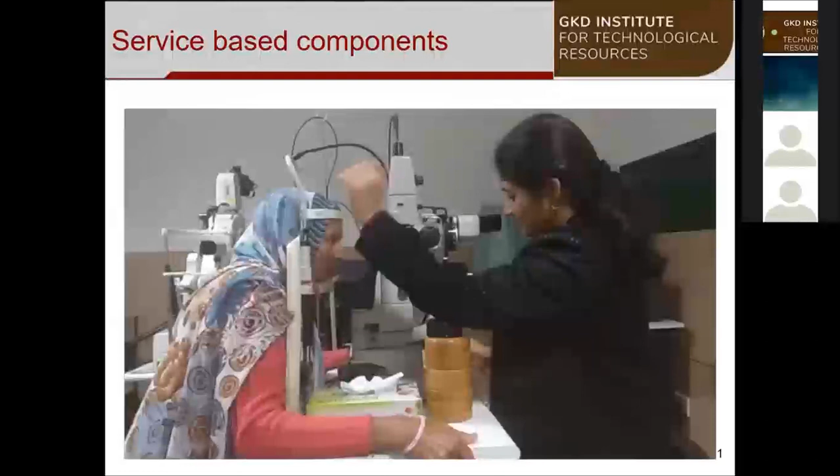So whenever there is an issue, they need to place an order with their supplier from Germany. When the supplier delivers the product, they don't deliver just the particular part which got broken. Usually it's the housing that tends to get broken frequently because of the continuous plunger movement. And when they deliver the part, they don't deliver this single part alone, they deliver the entire component together, which comes with the valve and an actuator motor. Everything comes in one single go.

So this costs roughly about 15 to 18,000, and from the time they order to the time they get this part, they need to wait for roughly about 18 to 20 days, and they spend quite a lot for getting this part every time.

So there came a situation wherein they wanted to see whether it is possible to go for an additive manufacturing application. So all we did is we took the data of this part, measured it, and it was completely 3D printed, and the replacement was done straight away in a matter of 4 hours. Now we have the data of it, whenever the part goes, we replace it immediately within a matter of 2 hours. Earlier they were spending about 15 to 18,000 rupees on this.

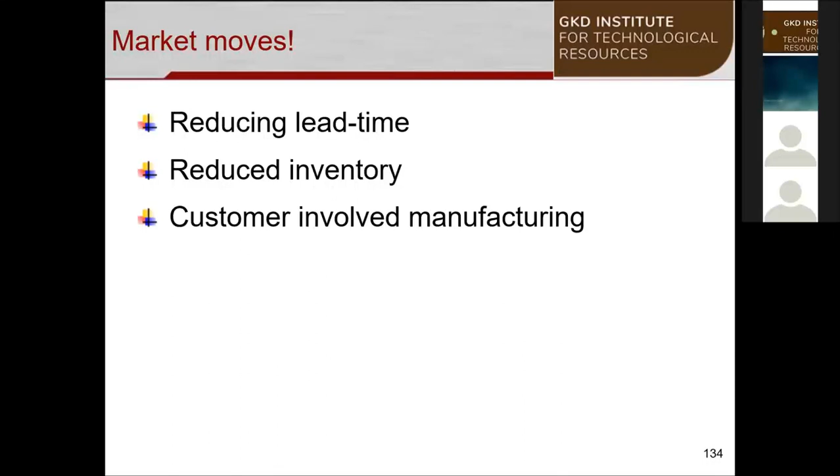So if you look at it, ideally the entire market is moving towards reducing the lead time, reducing the inventory, and moving more towards customer involved manufacturing. Speaking on these lines, we all know that yesterday Mercedes-Benz came out with the idea that already Lamborghini and Ferrari were using this model, and now Mercedes-Benz has come out with this particular model in India, that you don't need to go to the seller or the retailer in order to buy their vehicles. All you need to do is contact directly the manufacturer.

So contacting the manufacturer, you can decide what you want to have in your dashboard. You are given an option to customize your dashboard, where you want your music system knobs to be, where you want your cup holder to be, where you want what sort of thing that you are looking at. You can decide, or you can completely customize your dashboard of your vehicle. And once you have decided it, it goes through virtual simulation, and once you're done with that, your product gets delivered and you can pick it up.

And as the manufacturer is directly in contact with the customer, now you are speaking of cutting off the dealer profits. So they're projecting that the cost of the vehicles would possibly go down by 20 to 25%, which is going to the dealers now. It would directly come back to the customer as a profit, so thereby they are trying to improve the sales of the part.

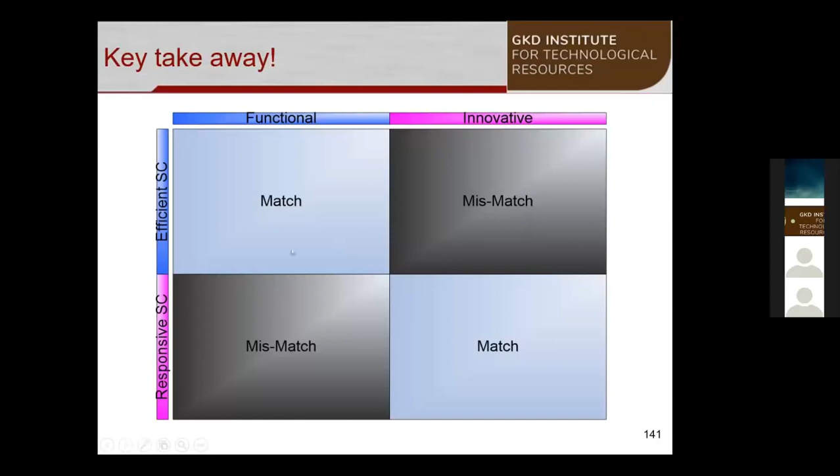For example, an efficient supply chain is the steel industry - it's a functional product. Your demand is possibly clear, your forecast error is less, so you know what your product is. So the moment your functional product is aligned with an efficient supply chain, you're perfectly fine.

On the other hand, when we call it an innovative product, your innovative product should be under the responsive supply chain. You can't make the customer wait for a longer time. You can't say that I don't have your product, I can't give you the quantity you're looking at. You can't change the quantities. Whereas in your functional product, you can claim that you will only give this particular quantity - you know your demand rate. But in an innovative product, you don't know the demand rate and you don't know what the fluctuation of your demand is going to be. The only thing you know is you need to have a responsive supply chain - you need to give what the customer asks immediately.

So the first thing to take away is align your product with the supply chain. Once you have aligned your product with the supply chain based on whether it is functional or innovative, whether it is towards an efficient supply chain or responsive supply chain, now you can think of the additive manufacturing integration. And when it comes to additive manufacturing integration, now you decide what is the supply chain that you have merged up with.

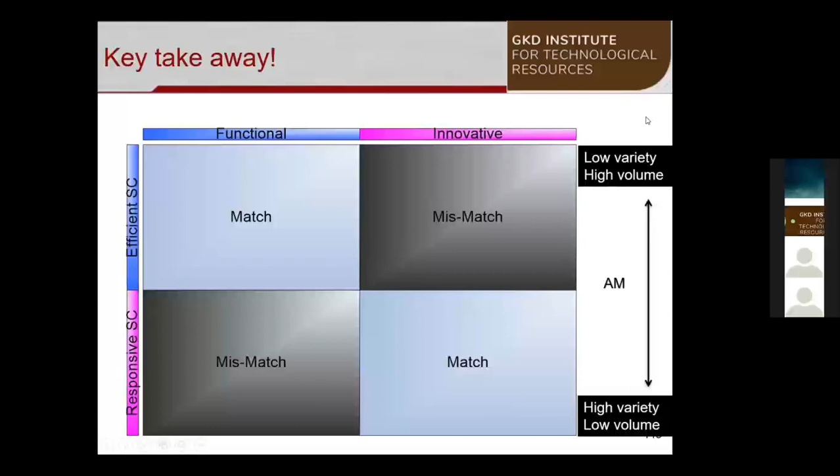The other important parameter is that the manufacturing cycle is going back to square one, wherein people started moving more towards customization. They want their product specifically designed or manufactured for their needs. So if your product variety is high and your volume is low, you can have additive manufacturing integration with a responsive supply chain.

The final important parameter is the level of customization you're going to go with. Are you speaking of mass customization? You can't stay with mass customization at this juncture; you need to go down in level. From mass, you need to go to pure customization. From pure, you need to go down to core customization. From core, you need to move to body fitted customization, or in some cases you might go between core and body fitted customization.

So those were the areas where integration of supply chain and additive manufacturing can take place. The key takeaway is you need to decide the level of your product at the moment. If you can push your product to the required extent, it will automatically find a fit and you can integrate it with your supply chain. If not, you need to push your product to that particular stage, and only then can the possible integration be made.